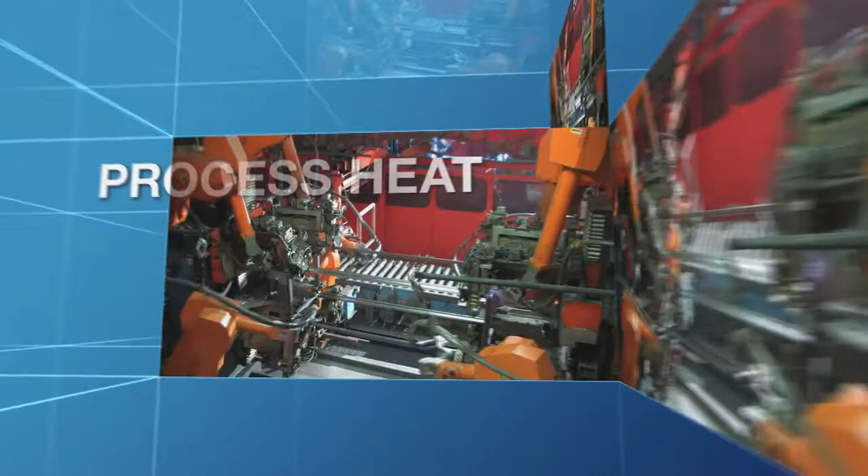Natural gas is highly versatile and used for an enormous variety of applications. As a fossil fuel, it serves principally for heating residential and commercial premises, as industrial process heat, for generating electricity, and as fuel for motor vehicles.

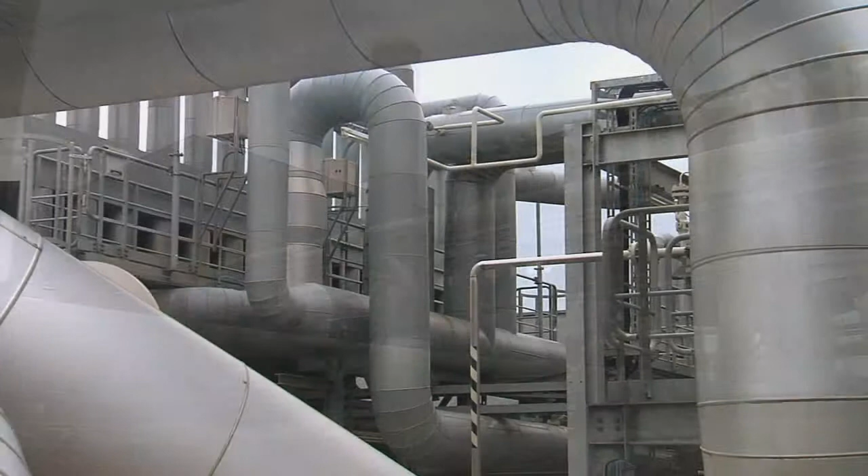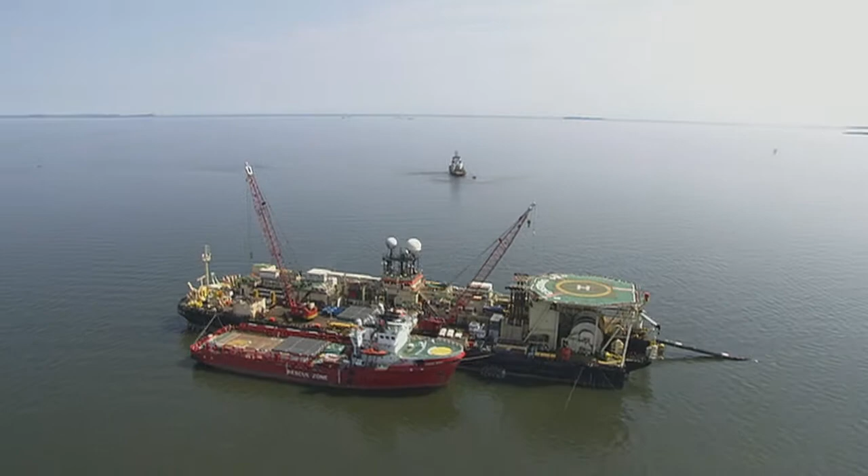Gas is indispensable in our modern-day world, and indeed it is taken very much for granted. This is why our supply of gas has to be secured. International connections and long-term agreements make sure that the gas actually reaches us. Our task is to make sure that it arrives safely.

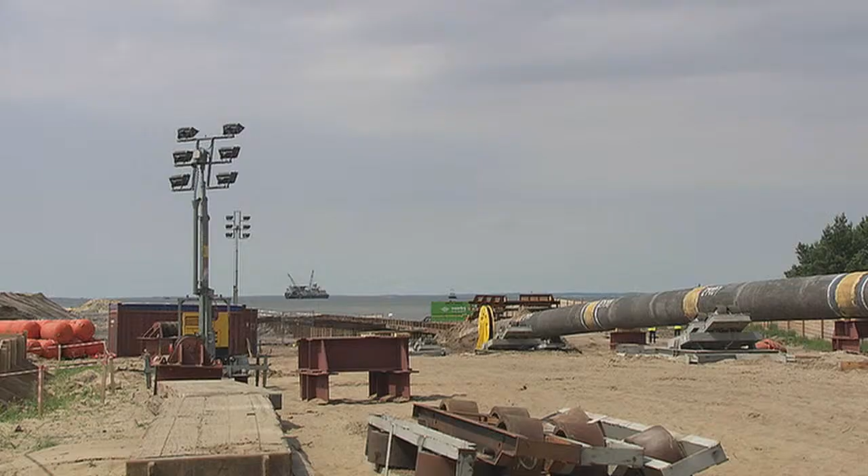TÜV Hessen, with all its expertise and experience gained from almost 20 years of pipeline construction testing, is, for this line too, also responsible for ultimate comprehensive testing. In this case, the gas comes from Siberia. Our subject is the Baltic Sea Connecting Pipeline, Opal for short.

It begins in Lubmin on the German Baltic Sea coast and runs for 470 kilometers to the Czech Republic. The client is WinGas, a joint venture owned by the BASF subsidiary Wintershall and by Gazprom, headquartered in Kassel, Germany.

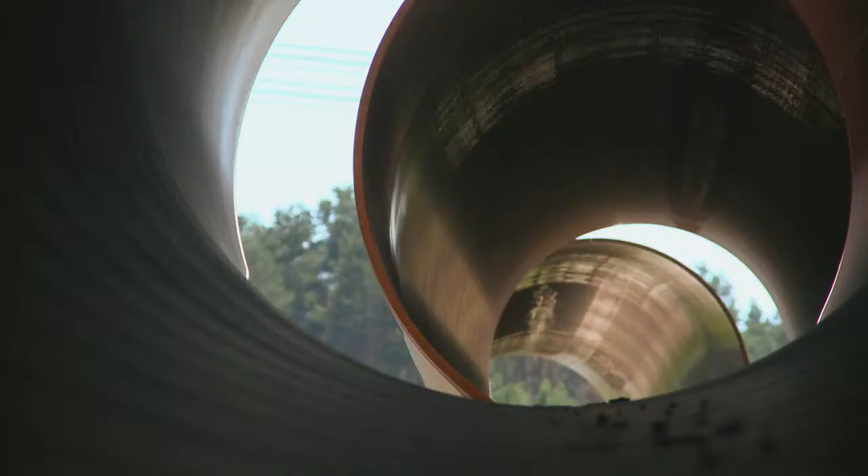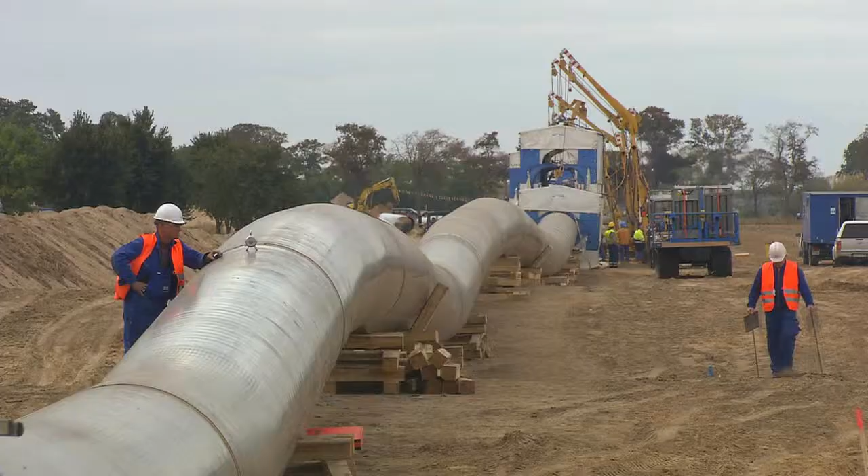Opal boasts some very impressive figures: more than 26,000 pipe sections, each of them 18 meters long, 1 meter 40 in diameter, and weighing 15 tons, and each individually formed to meet the topographical challenges. A project of massive dimensions involving numerous challenges that had to be met and mastered.

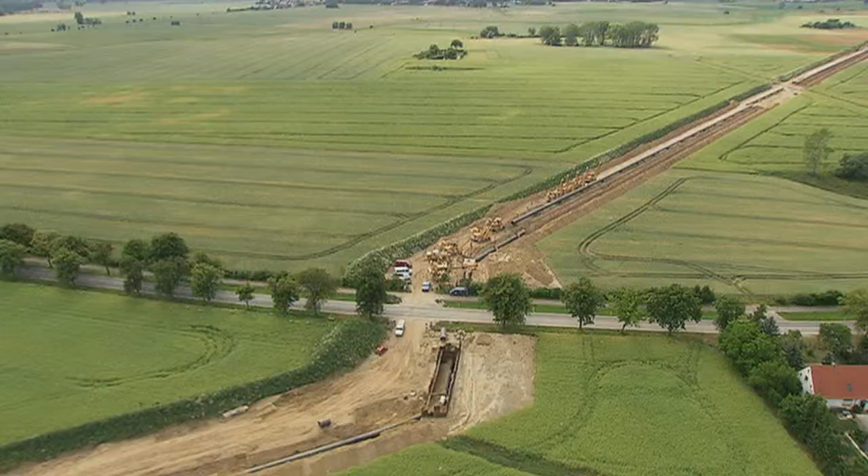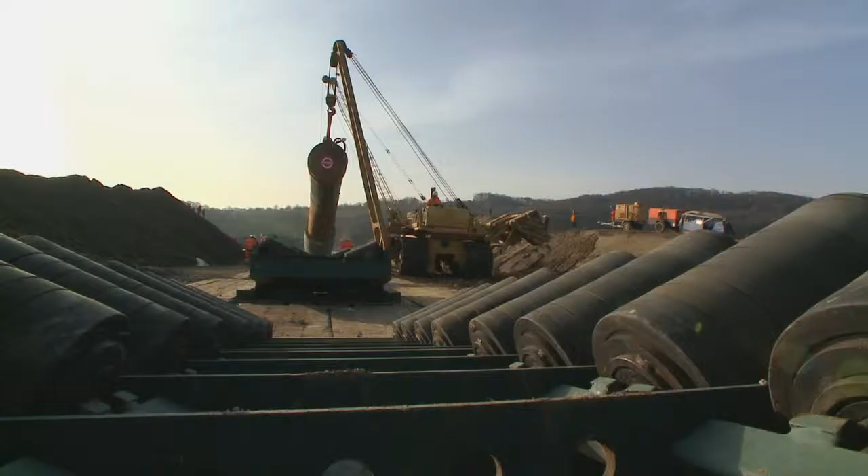Along its route, Opal crosses 172 roads, 3 major rivers, 39 bodies of water, and 27 railway tracks. The gas pipeline provides an annual transport capacity of 36 billion cubic meters of natural gas. This corresponds to the annual amount of energy produced by 15 new nuclear power plants.

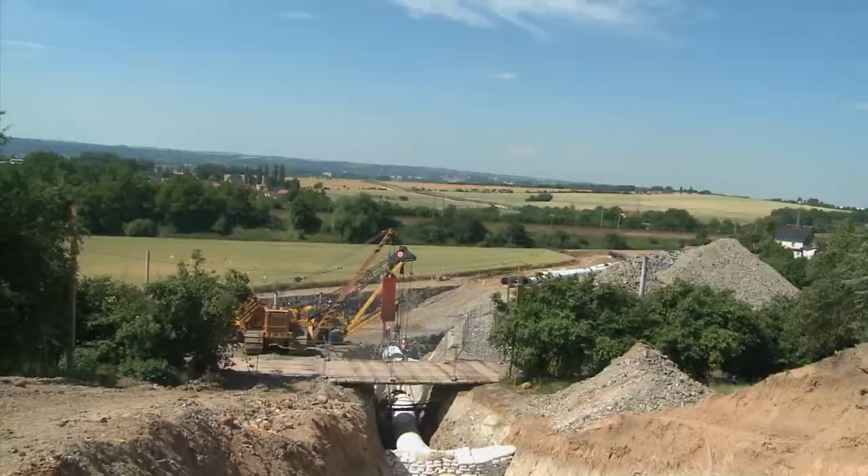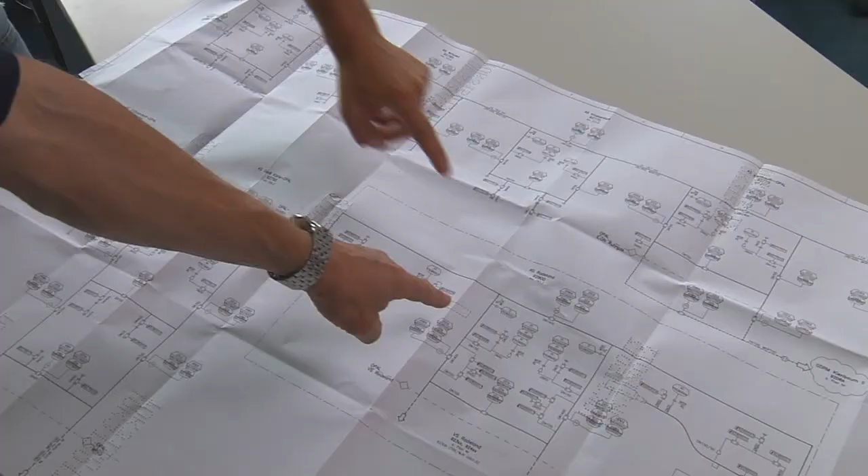Highly complex projects demand highly professional specialists. The expert appraisers from TÜV Hessen are acknowledged specialists in their chosen field. Besides a university degree, they also hold qualifications as specialist engineers for welding and non-destructive testing. Our work begins by verifying fundamental eligibility for approval and obtaining an expert appraiser statement.

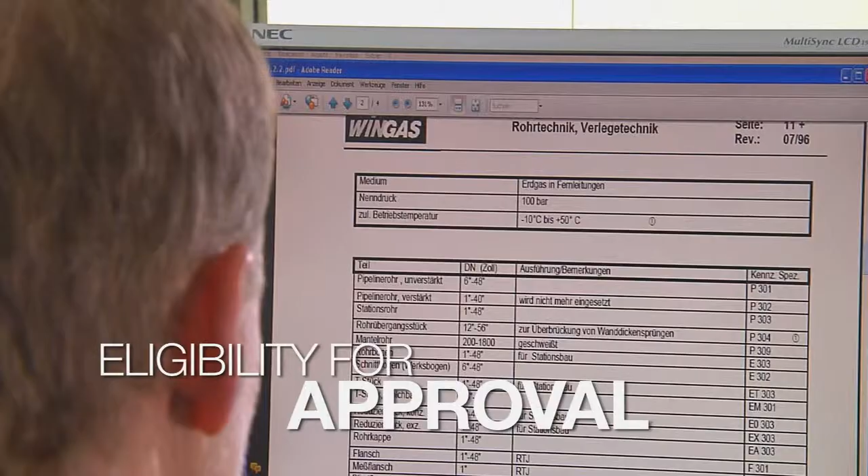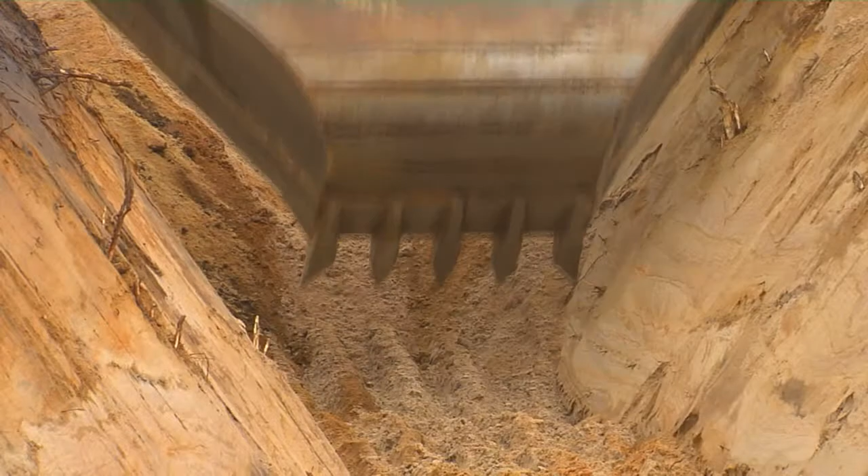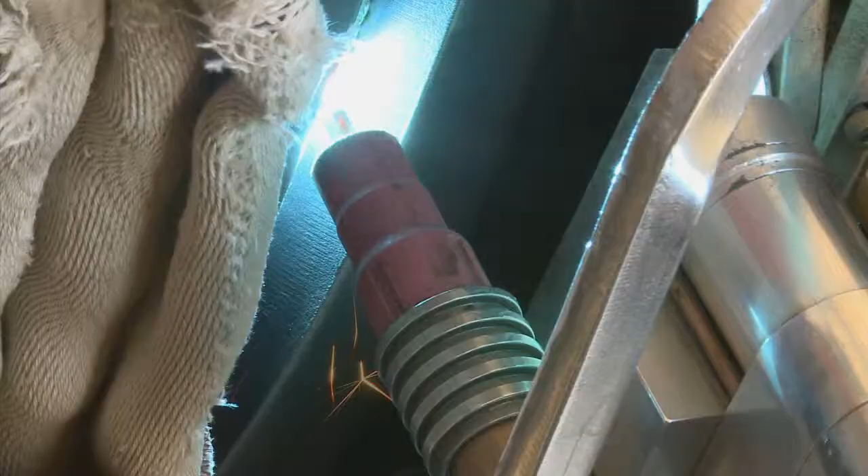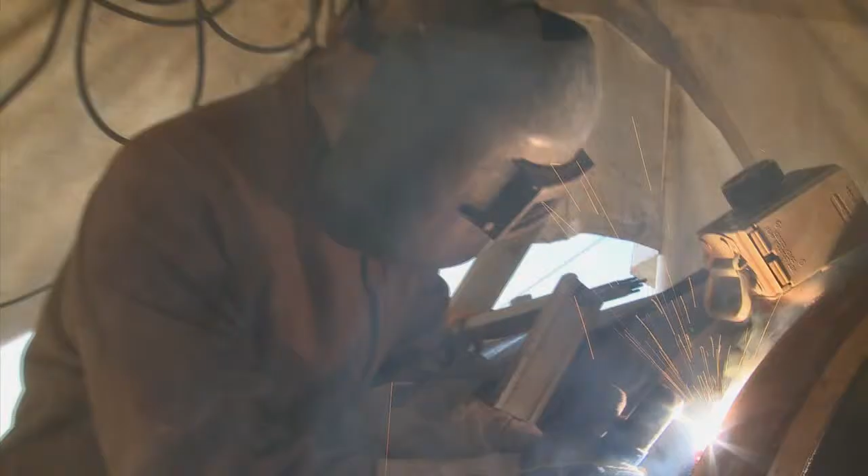The next step is putting theory into practice, and this requires professionalism and precision. The specialists on this site are the welders, carefully chosen professionals from Italy, Spain, Germany, Poland, England, Turkey, Romania, and Austria. Their task: to weld 26,000 seams under on-site conditions. TÜV Hessen makes sure that only properly qualified craftspersons are deployed, as evidenced by proficiency tests and the validity of their welder's examination in accordance with EN 287-1.

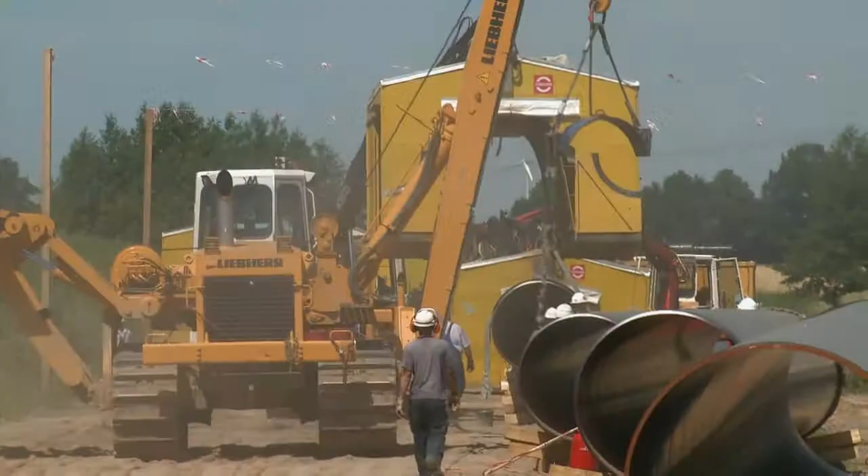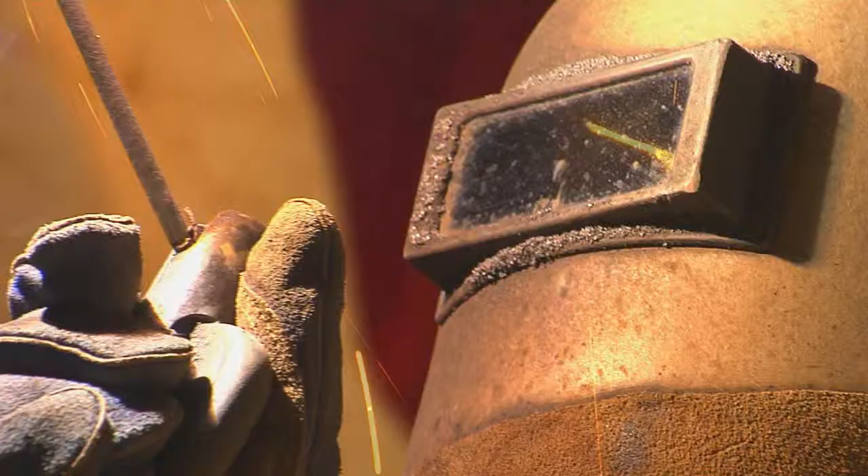For Opal, 3 types of welding are used. The preliminary constructions are welded together using a metal active gas process. Then they are connected by hand using electric welding. And at the stations, the weld seams are created by hand using a TIG process.

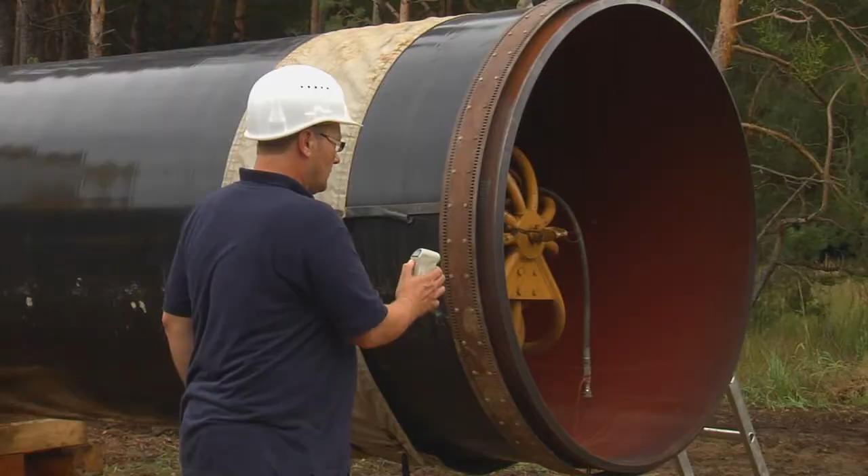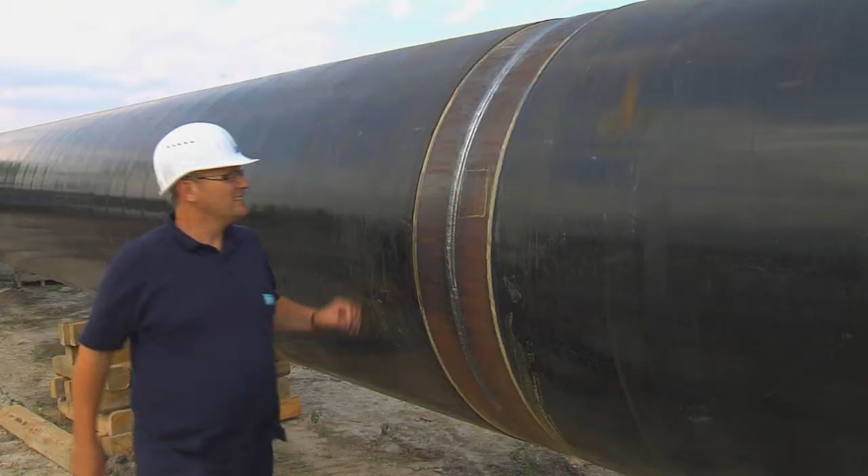During all these operations, we use random sampling to check the temperature control during welding, the pre-warming temperature, the intermediate layer temperatures, and the cool-down speed. Then, every completed seam is subjected to a visual inspection.

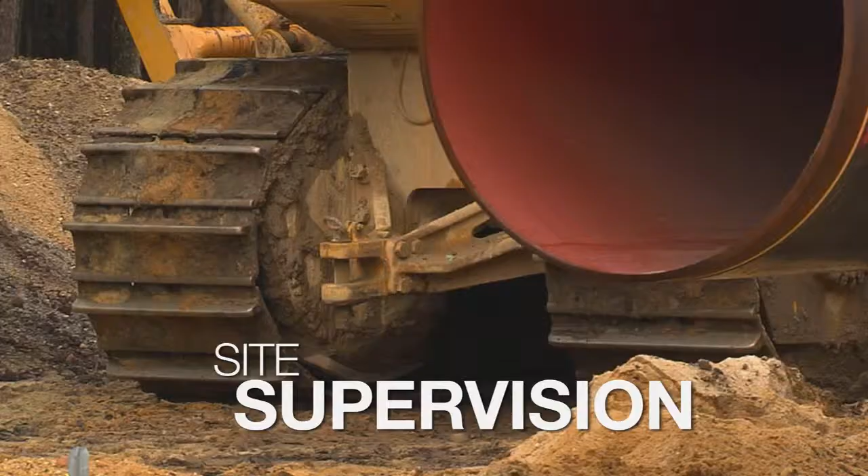The subsequent lowering of a pipeline section under the stern gaze of our expert demands precision down to the very last millimeter. The ultra-professional side boom crane operators do their job with an exceptional delicacy of touch.

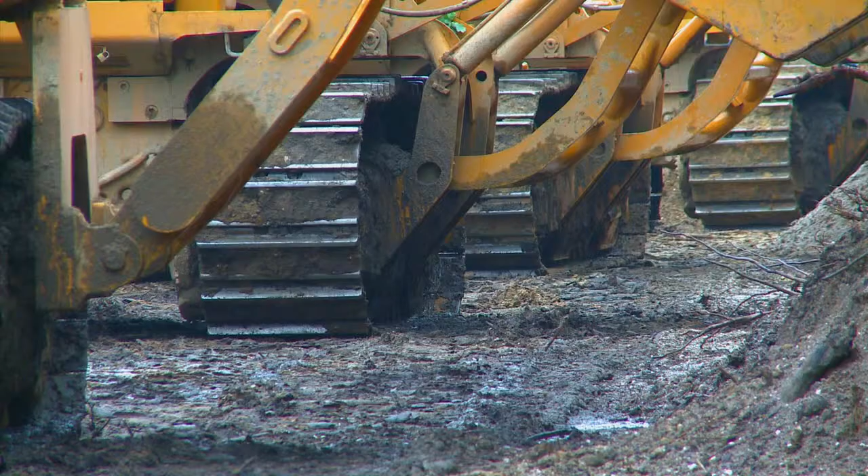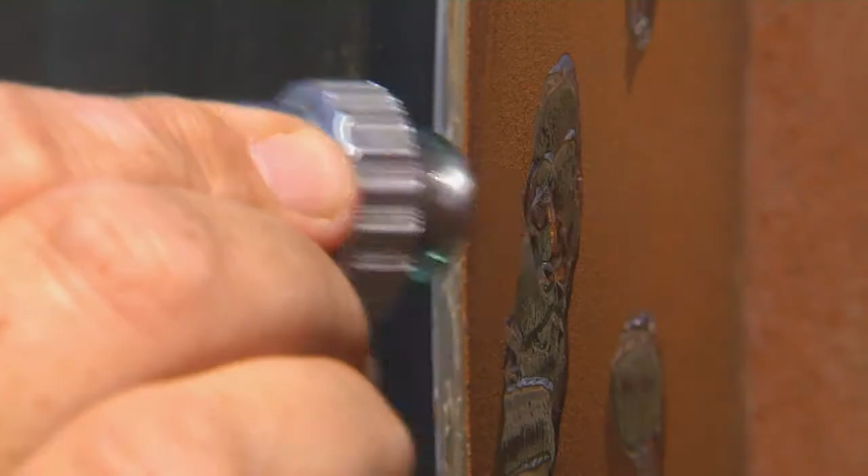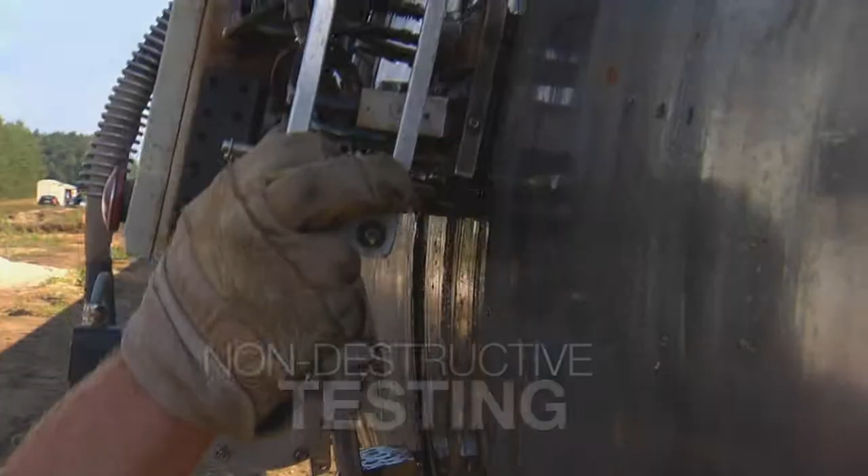The finished weld seams are meticulously tested in both destructive and non-destructive procedures. The non-destructive tests are conducted in 3 different procedures. These tests are part of the construction company's remit. All the seams created in the preliminary work are checked using a mechanically guided ultrasonic scanner.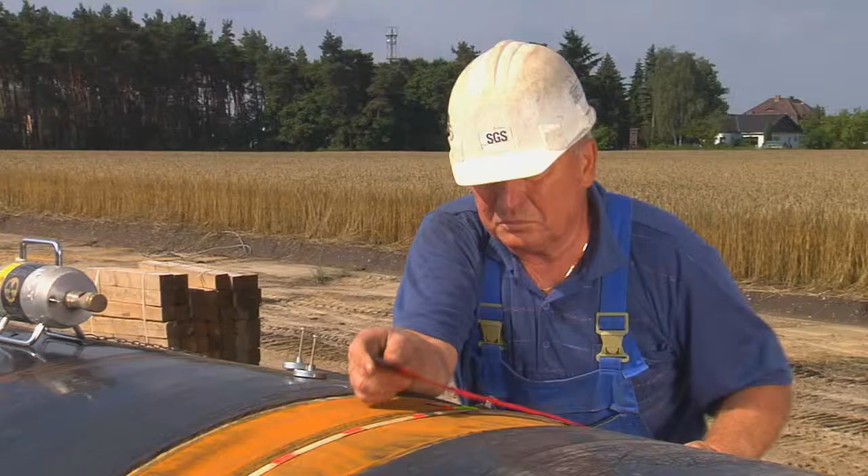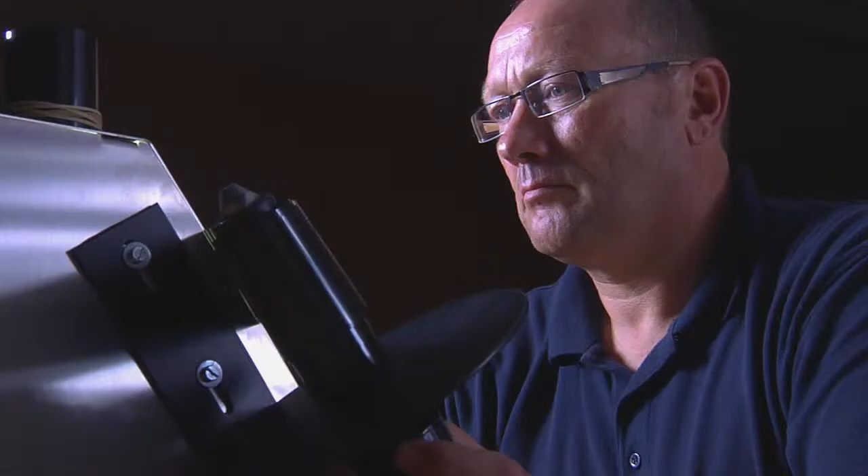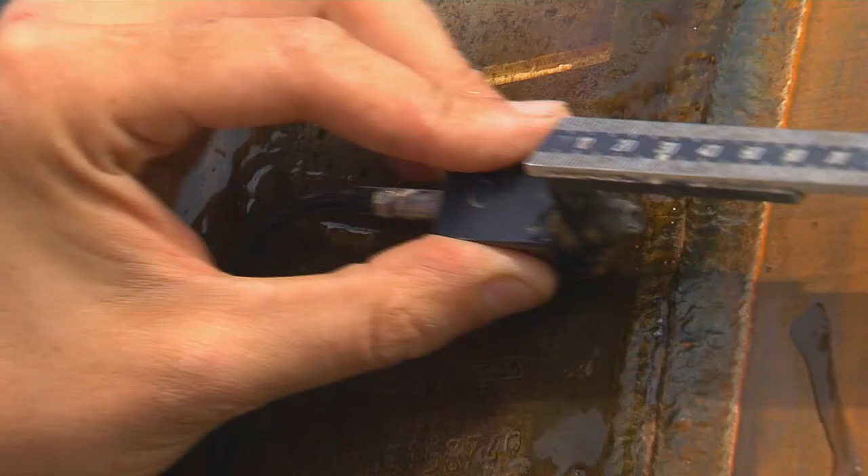Approximately 30% of these preliminary construction seams are additionally irradiated by an X-ray tube. The results of these tests are meticulously examined by our expert appraiser, seen here studying the X-ray film. When examining the guaranteed seams, an additional ultrasonic test with a handheld sound source makes double certain.

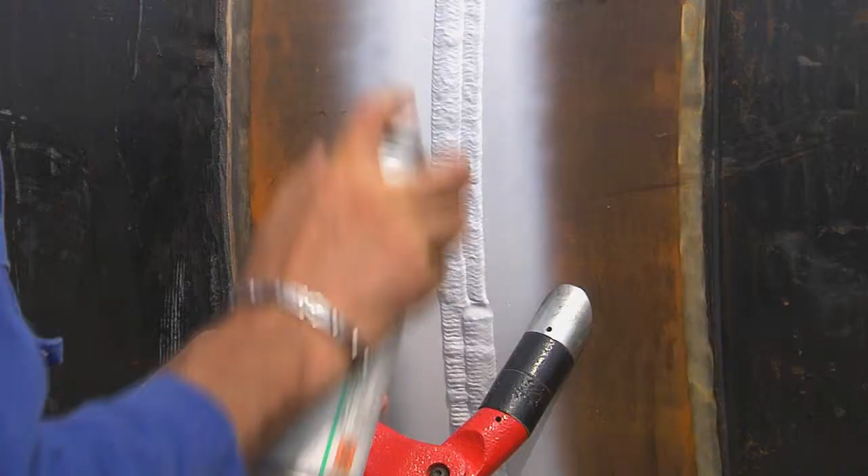In the case of sockets or fillet welds, the magnetic powder crack test procedure is used. All results are analyzed on a daily basis, monitored by TÜV Hessen to enable the appropriate action to be initiated immediately if it proves necessary.

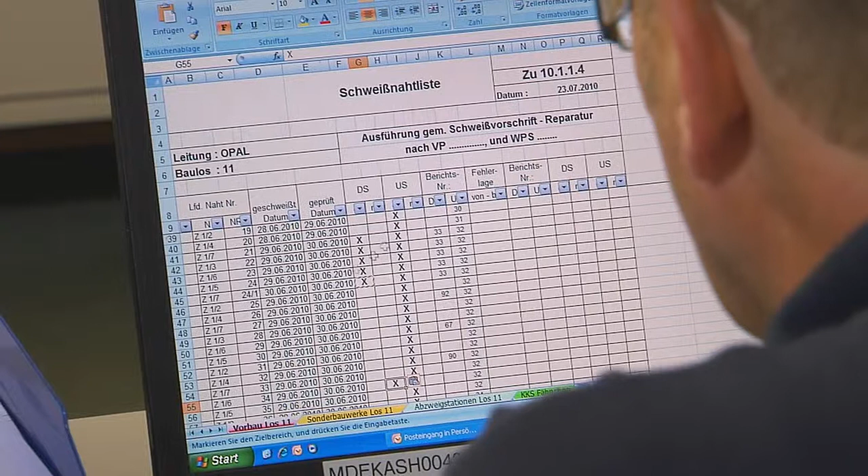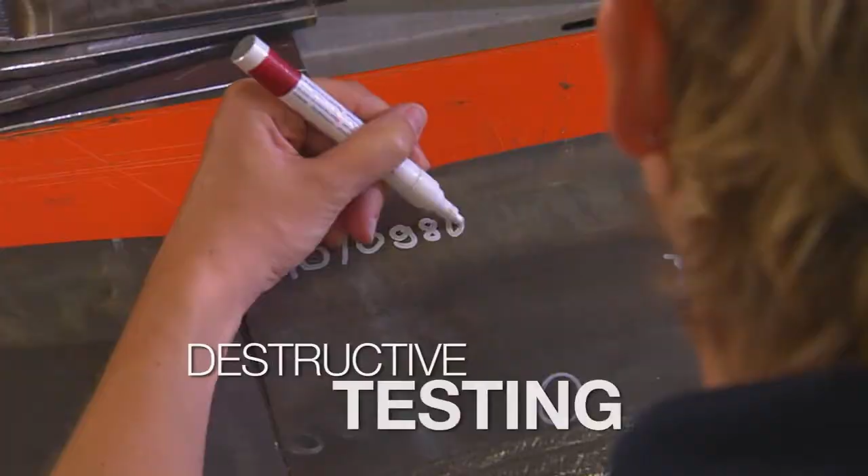In the destructive test, for each construction batch, 3 defined samples are taken and subjected to an intensive examination immediately after arrival in the TÜV's own accredited test laboratory.

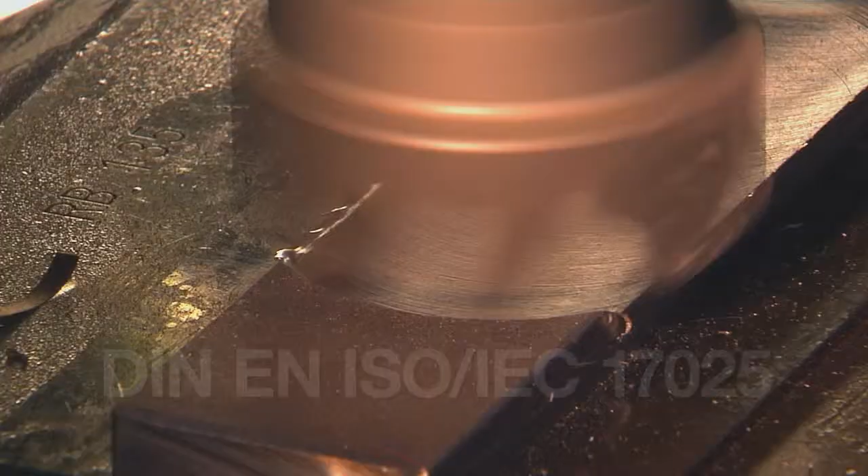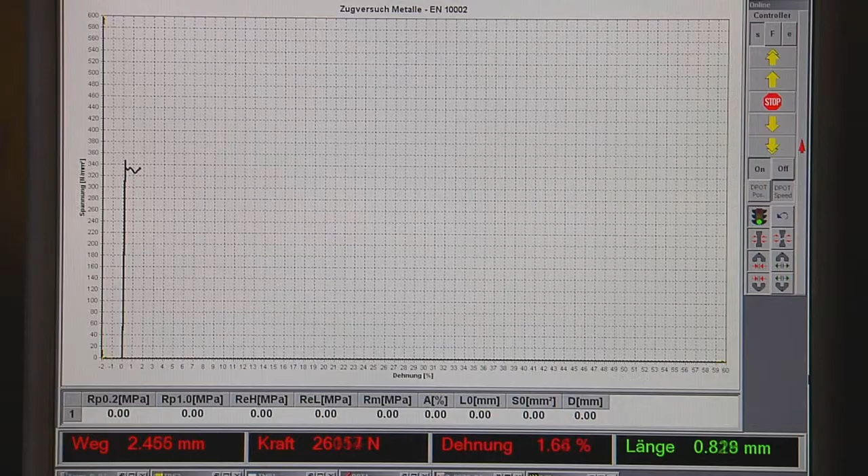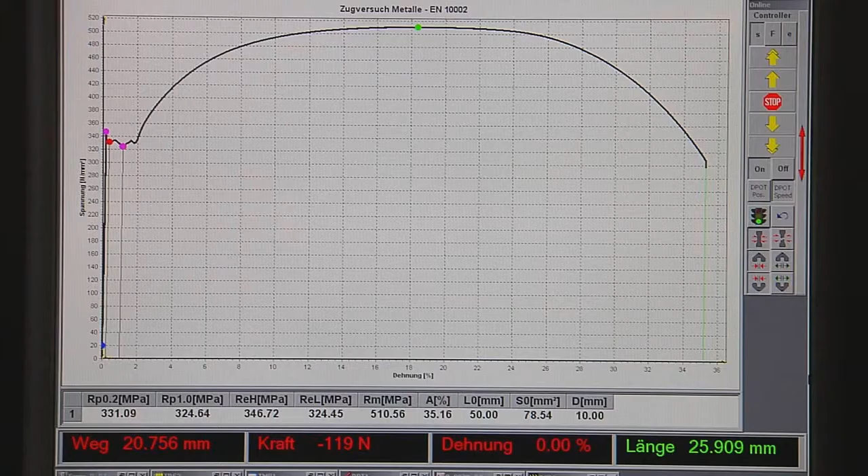All these tests focus on the key mechanical technological figures for the weld seams. The tensile test shows the forces at which elastic deformation ends and plastic deformation begins, until finally the base material tears. The weld seam holds.

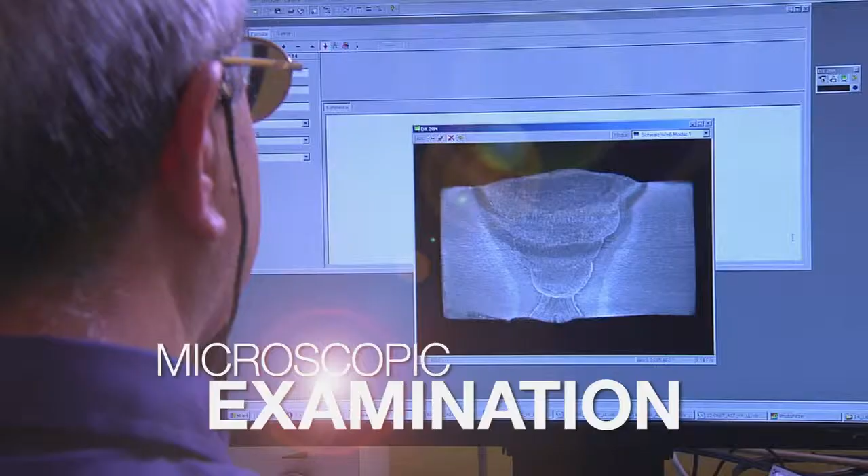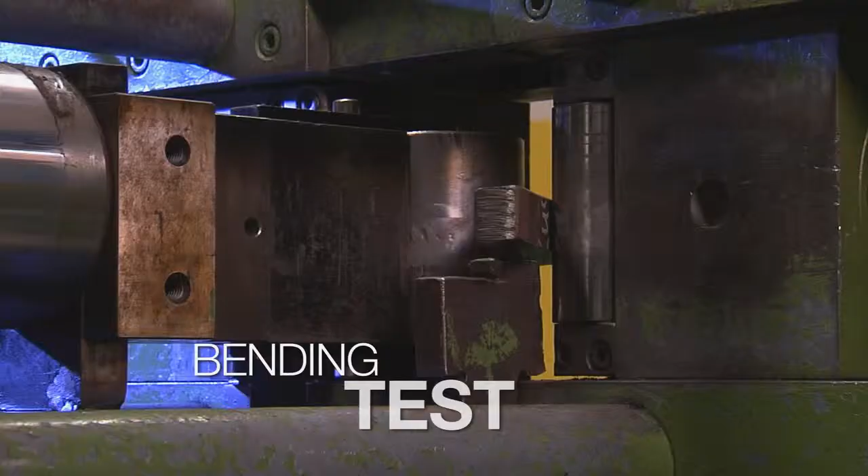The macro section constitutes the preparation for examining the sample under a microscope. The enlargement on the monitor clearly shows the base material, the filler, and between each of these, the heat-affected zone. The bending test shows the extent of plastic deformation and the quality of the weld seam.

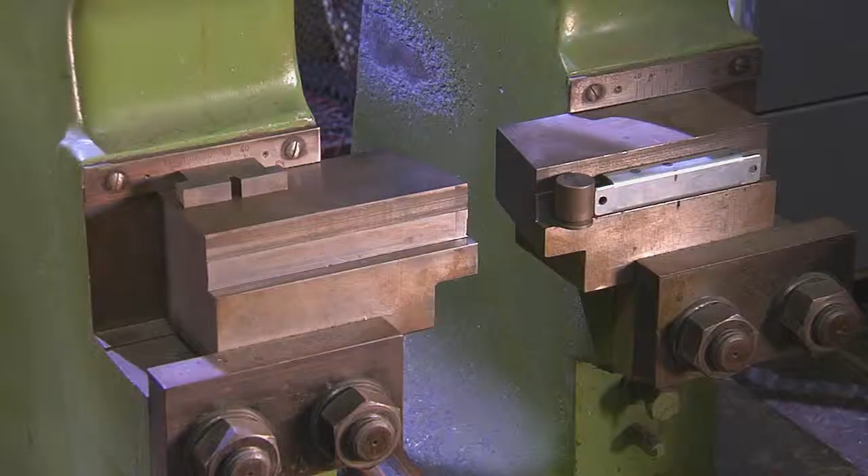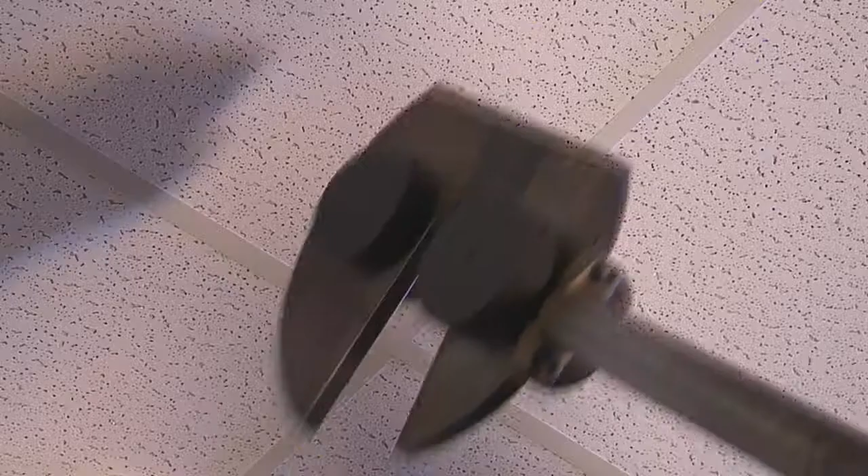The notched bar impact bending test examines the toughness characteristics involved. Test condition: material temperature precisely minus 20 degrees Celsius. The notched bar impact hammer strikes the unilaterally notched workpiece at high speed. The energy that is absorbed while the sample is being shattered enables conclusions to be drawn about its toughness.

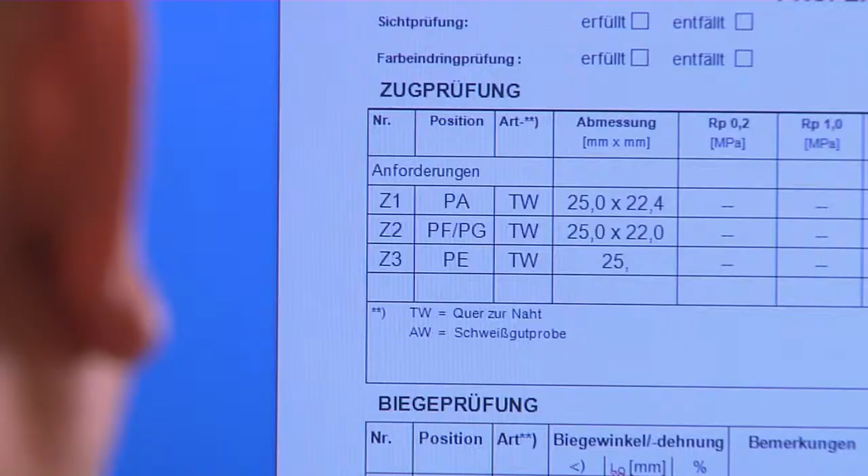Finally, the laboratory manager summarizes the result in a test report. If one of the samples is not up to standard, repair work is immediately specified and initiated, after which the sample is tested again.

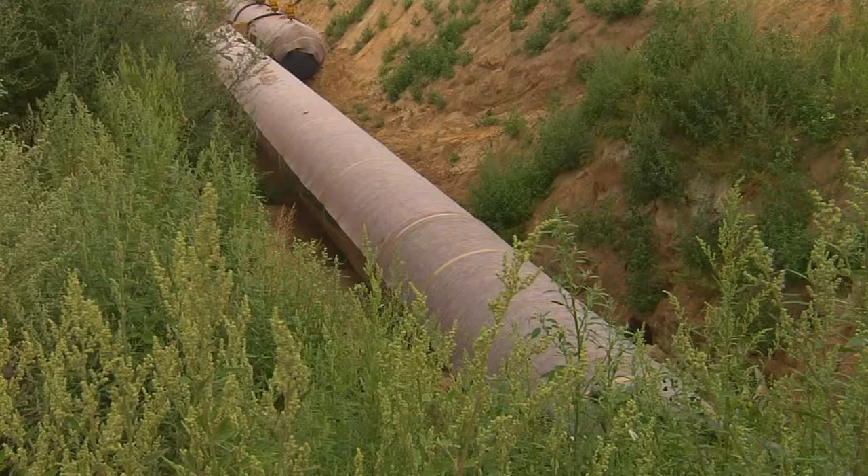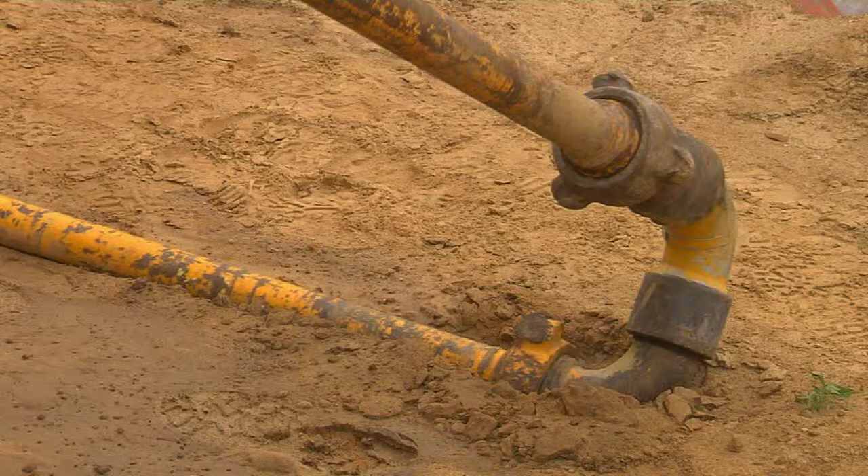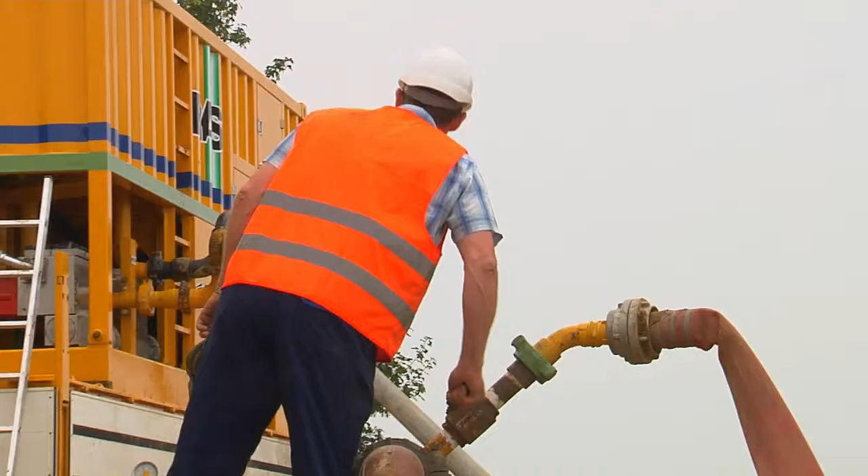After the details, the pipeline as a whole is subjected to its own test, a stress test in accordance with VdTÜV 1060. For such a pressure test, around 10,000 cubic meters of water are pumped into a section about 6,000 meters in length. The pipeline's operating pressure is 100 bar. For the stress test at 175 bar, another 120 cubic meters of water are added using high-pressure pumps designed specifically for this site.

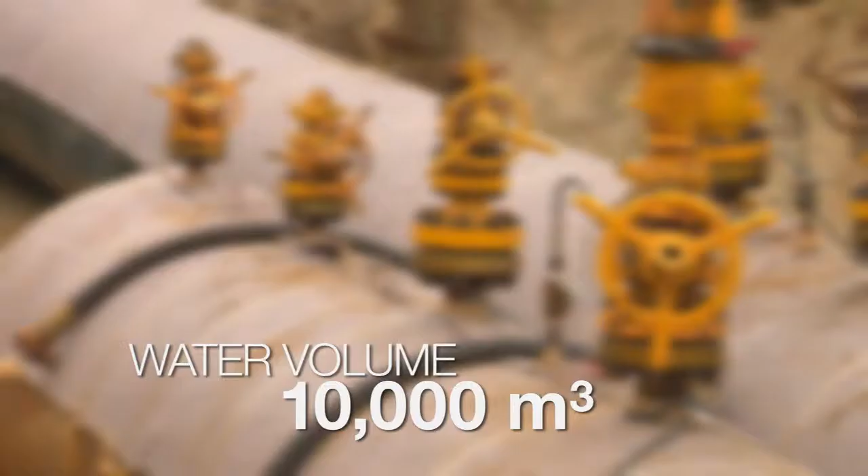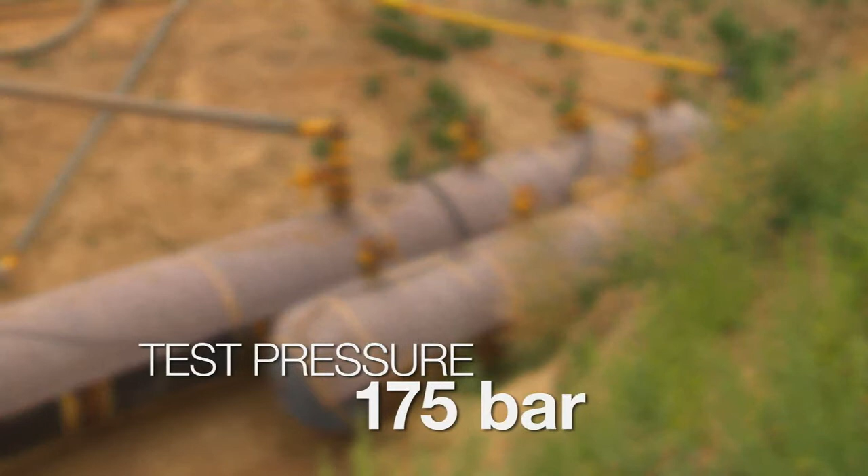To provide a vivid comparison, the volume of water required, 10,000 cubic meters, would be enough to fill 4 Olympic-sized swimming pools. The test pressure of 175 bar corresponds to the water pressure encountered by deep-sea divers at a depth of 1,750 meters.

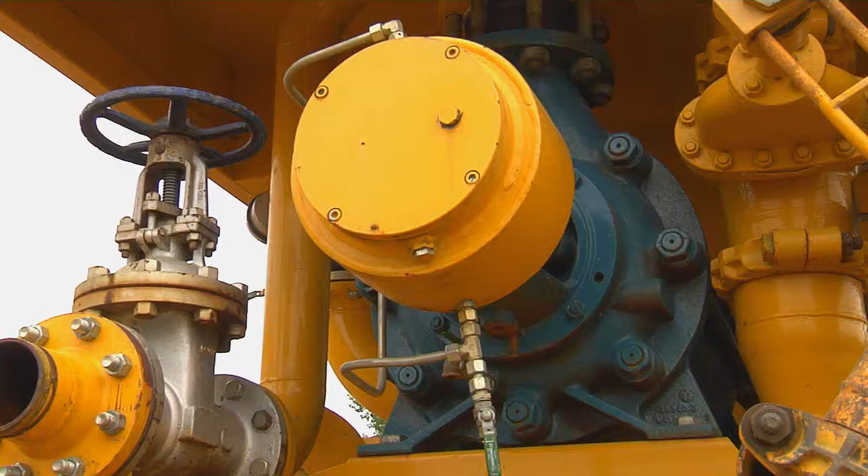In the stress test, it is primarily the welding and laying stresses that are downsized. Our expert appraiser continuously records all the measurements taken. As a genuine strength and endurance test, the procedure stresses all OPAL's pipes up to almost the actual yield point. The stress test is at present the only test procedure that itself rejects hazardous defects.

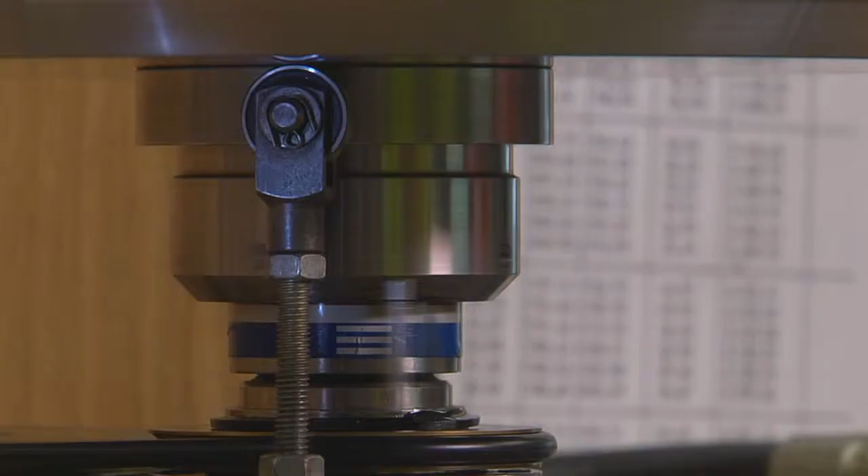In contrast to most other test procedures, the stress test serves both to check and also to optimize a pipeline. This enhances the operational dependability and cost efficiency of the pipelines tested. Thus, the stress test has 2 functions. It serves to verify the mechanical strength and at the same time is the final piece of construction work on the pipeline.

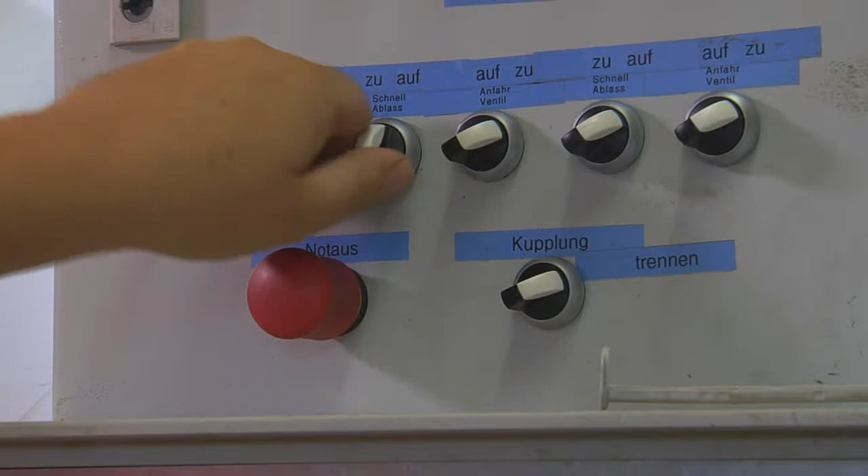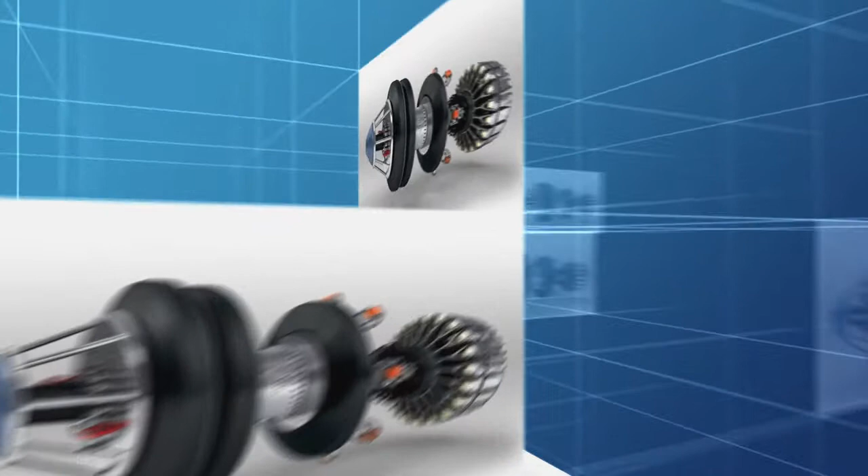At the very end, after all the construction work has been completed, a visual inspection is performed from the inside using a Go Devil test. The entire pipe geometry inside is measured by a caliper pig, the Go Devil. All the facts, figures, and test results are recorded in the pipe logbook, the most important document for a pipeline. Each pipe has its own pipe number.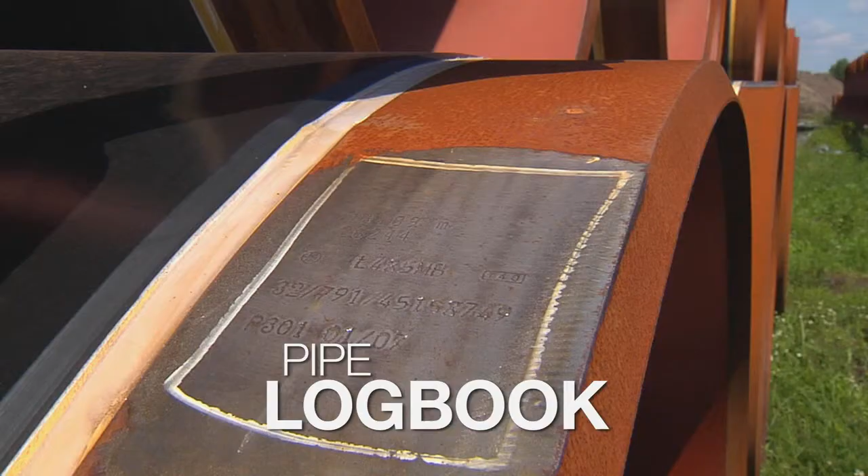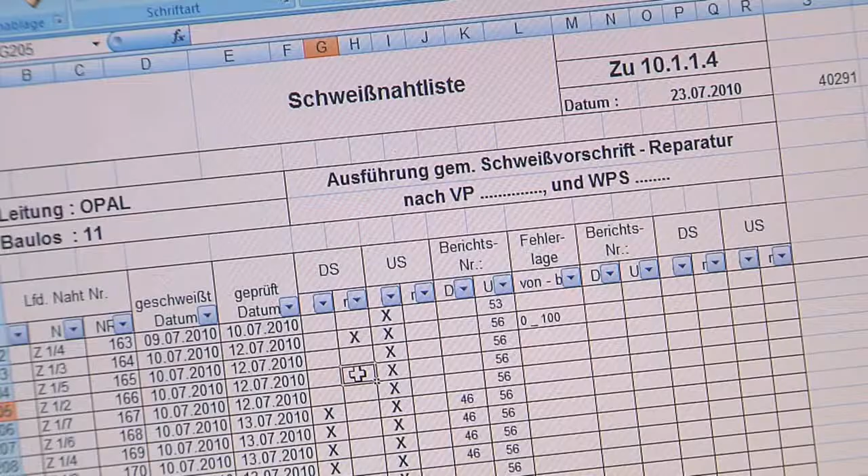All important pipe data are hard stamped on the outside and soft stamped on the inside, with pipe number, batch number, pipe length, material, and the order number. These data are recorded by the pipe logbook keeper and checked for correctness by the expert appraiser. Plus, of course, the data on the creation of the weld seams: seam number, date of welding, particulars of the welding team, particulars of non-destructive testing, plus any special features involved.

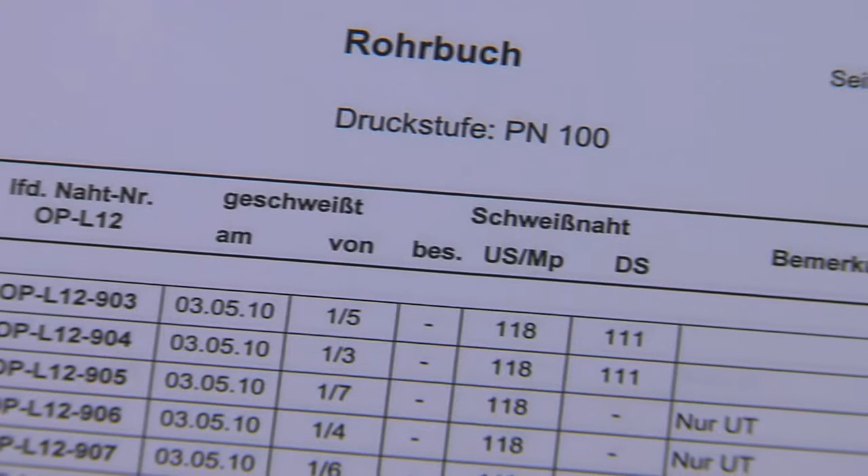Once the individual sections have been successfully pressure tested and these sections linked up, the job is done. During the startup procedure, the expert appraiser from TÜV Hessen issues an advance certificate in accordance with Section 6.1 of the German High-Pressure Gas Pipeline Ordinance.

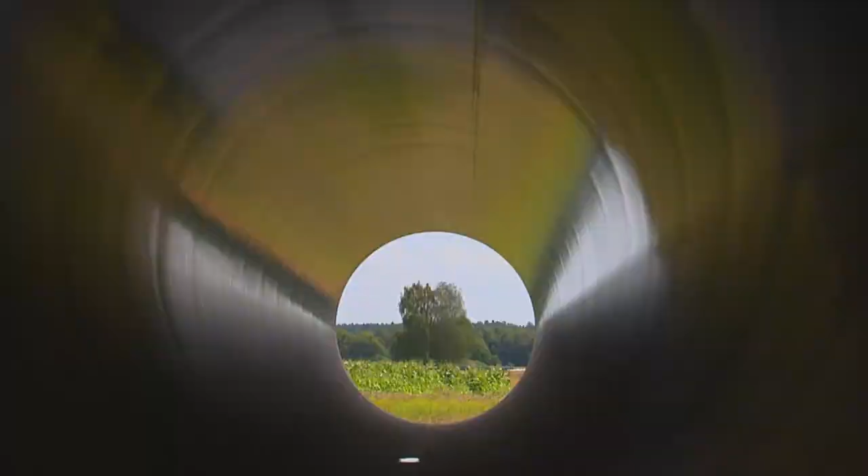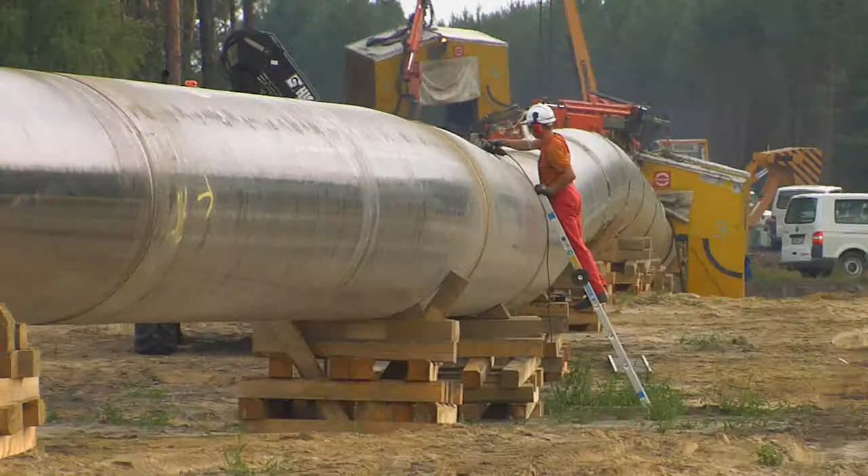A long route involving massive amounts of people, machines, and materials. A gigantic project. For the construction work, 2,500 skilled workers. For ensuring safety, 1 project manager and 7 expert appraisers from TÜV Hessen, supplemented by particularly well-qualified experts for a total of 95 pressure tests.

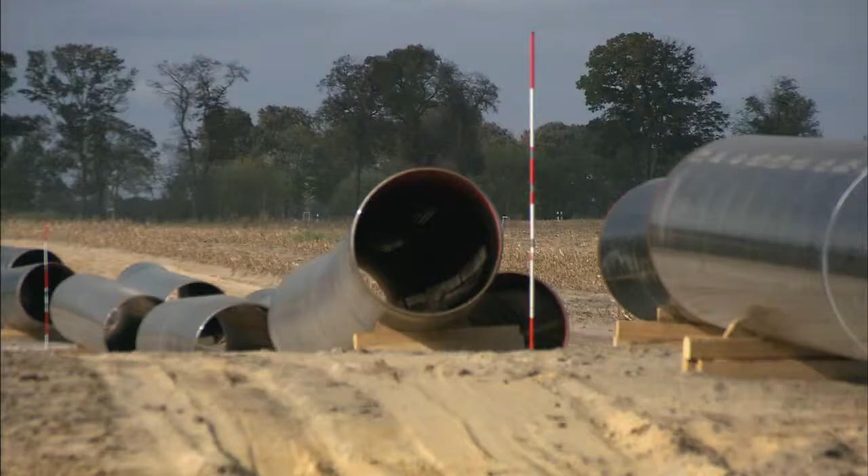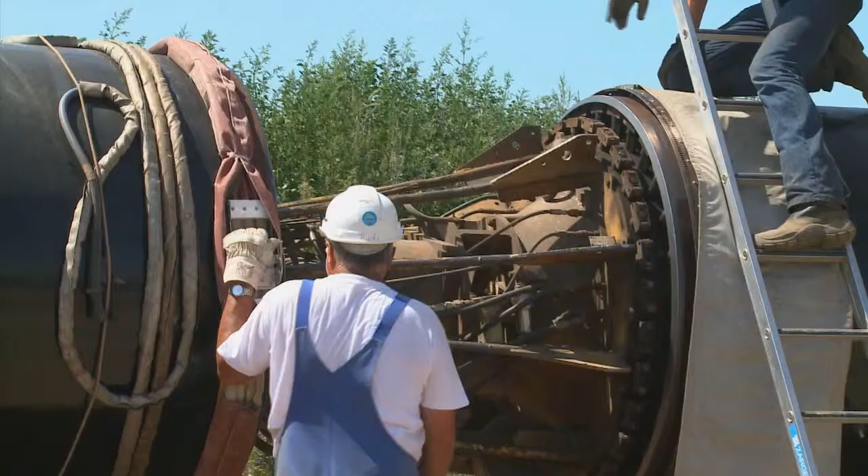We take our responsibility seriously. With our specialized capabilities and daily on-site involvement, we guarantee compliance with all the relevant technical standards. We stand for the safety and dependability of all the work performed, and thus also ensure that consumers can rely implicitly upon the gas reaching them.